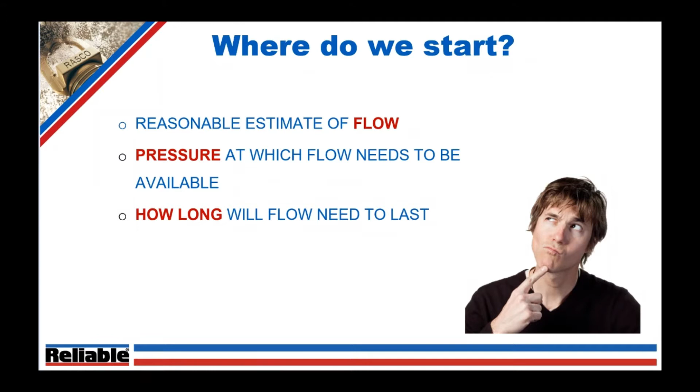Number 1, a reasonable estimate of the flow required. Number 2, the pressure at which that flow needs to be provided to us. Number 3, the duration—how long will the flow need to last? And then number 4, more germane to today's presentation, if it's got rack storage, are in-rack sprinklers necessary? That's where we're going to start our look into our storage occupancy.

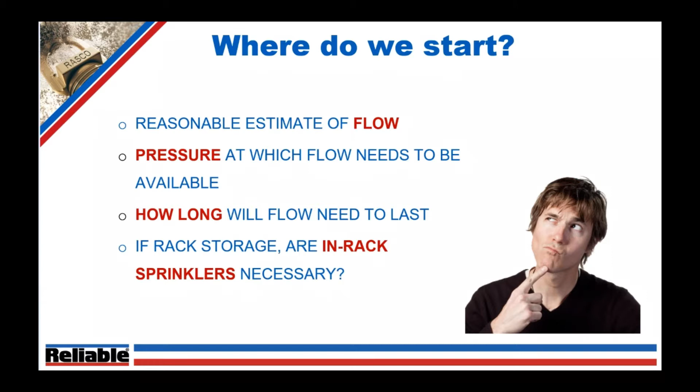Once we get to the point where we've decided that racks are necessary, we're going to get into the details of what that rack system looks like. As we move along here, the most prominent change to rack protection we'll be dealing with today is in the multiple row rack world, but there are some impacts to single and double row racks as well. So what I'd like to do is a quick review of the definitions of the 3 types of racks.

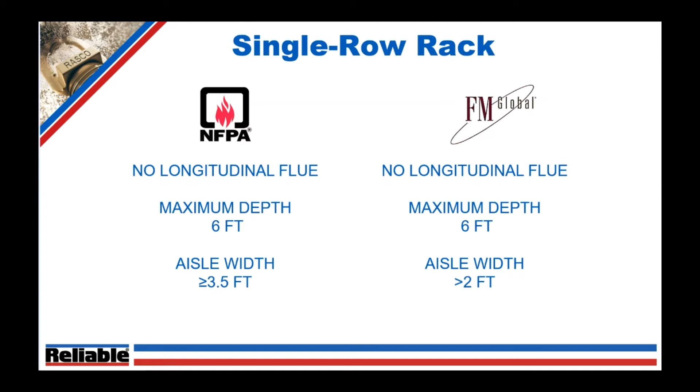Single row—pretty simple, right? Fairly straightforward. It's a rack with no longitudinal flue. Generally we see these up against the exterior walls, but they can exist out in the main area as well. The rack depth is limited to a maximum of 6 feet. NFPA defines an aisle as a minimum of 3.5 feet, whereas FM says it's a minimum of 2 feet. I always kind of look at the distinction between an aisle and a flue as whether or not I can run pipe through it. If I can't run pipe through it, that generally means there's going to be material handling equipment or people moving through it—in other words, it's going to be an aisle.

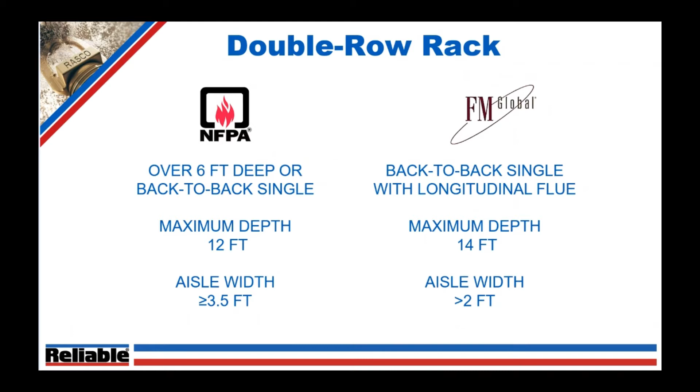Double row racks: while a longitudinal flue is common in double row racks, NFPA by definition does not require one—they could simply be backed up against each other with no longitudinal flue space. FM, in the definition of a double row rack, says it will have a longitudinal flue of 24 inches maximum. Maximum depth, again, is defined in NFPA as 12 feet, which is your two 6-footers back to back with no flue space. With FM, you have to do a little bit of math—at least this is my understanding. Two 6-foot racks with a maximum flue space of 24 inches would tell us that the maximum overall depth would be up to 14 feet. And again, aisle widths at 3.5 and 2 feet respectively for NFPA and FM.

Multiple row racks are essentially defined as a single rack over 12 feet deep, or single or double row racks with aisles less than 3.5 feet. The maximum depth of multiple row racks is essentially unlimited, which makes you wonder why we worry about aisles. But if we're going to call them aisles, the sections or groups of racks separated by those aisles must meet the 3.5 feet or 2 feet width shown.

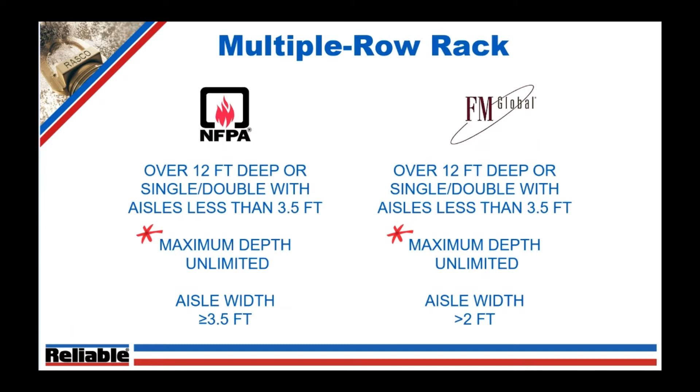Now, I do want to throw an asterisk on the maximum depth, since as we move through the presentation, that's only the case if certain particular conditions are met. That's the main change we're going to see happening here.

So in order to understand the impact of missing one of these conditions that require treatment as a solid shelf, I think it's also important to review the basic FM and NFPA requirements for in-rack sprinklers, solid shelf or otherwise, and we're going to start with FM.

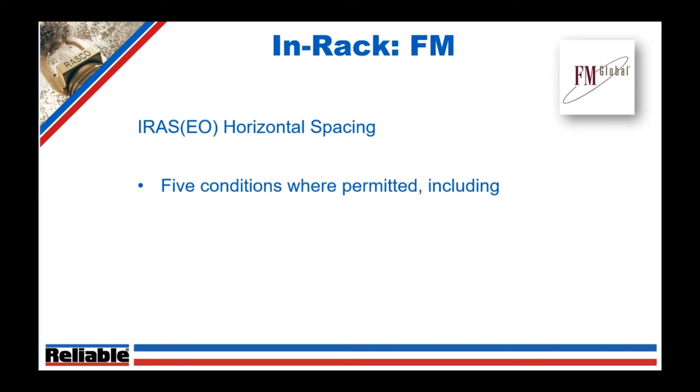FM makes horizontal spacing decisions relatively easy. They provide us two options: an every other or an every transverse flue space option. There are 5 conditions where the every other spacing is allowed. One of those conditions, since we're talking about solid shelves today, is that you can do an every other spacing where the solid shelves do not exceed 64 square feet and the ceiling height is 25 feet or less. Both of those conditions must apply in order to use the every other spacing.

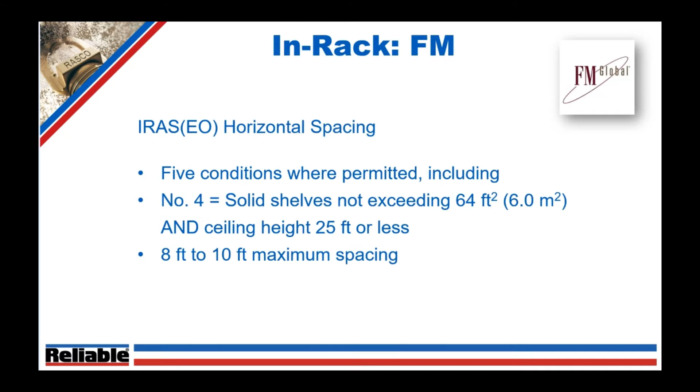In doing the every other spacing, as you read through the requirements in FM, you'll see that you end up in a spacing range of about 8 to 10 feet on center, 10 feet being the maximum. The every transverse flue space option is required everywhere the every other can't be used.

Pretty simple - look at the conditions in the preceding section. If I'm not in that condition, I have to do the every spacing option. So again, where every other is not acceptable.

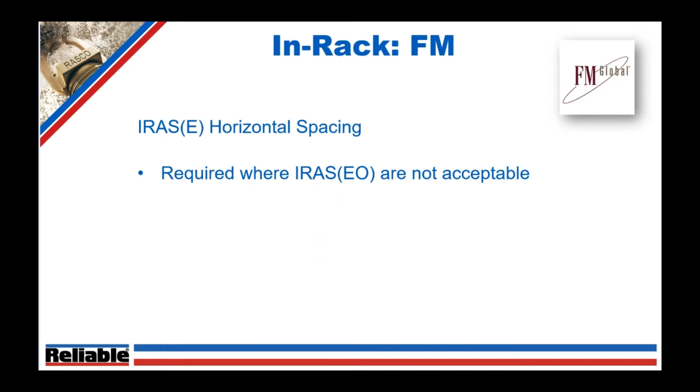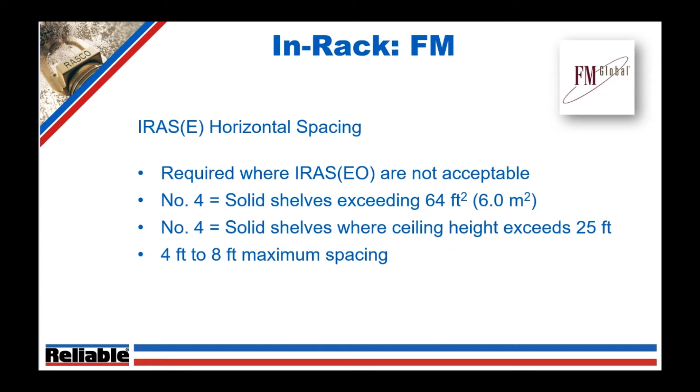Going back to number 4 in the preceding slide, when our solid shelves exceed 64 square feet, we are now into an every flue space option, or where we have solid shelves and the ceiling height exceeds 25 feet, we're going to be in the every option. Working through the diagrams and language in FM 8-9, you end up with spacing in the range of around 4 feet to a maximum of 8-foot spacing horizontally.

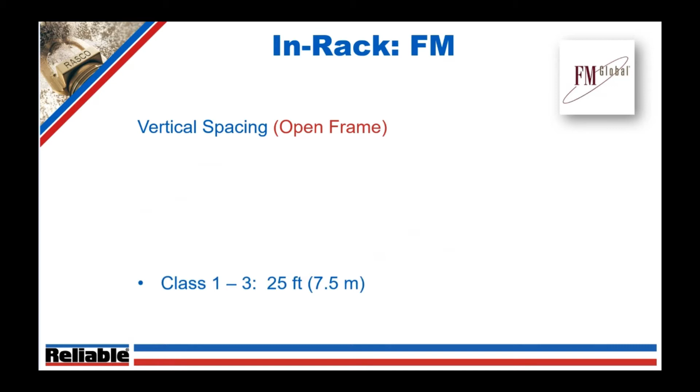If we then look at the vertical spacing of the sprinklers, where multiple layers are required, for open frame it's fairly straightforward. It ranges from 25 feet for class 1 through 3 commodity, and drops in 5-foot increments to our most hazardous commodities, the uncartoned plastics, at a 10-foot maximum vertical spacing.

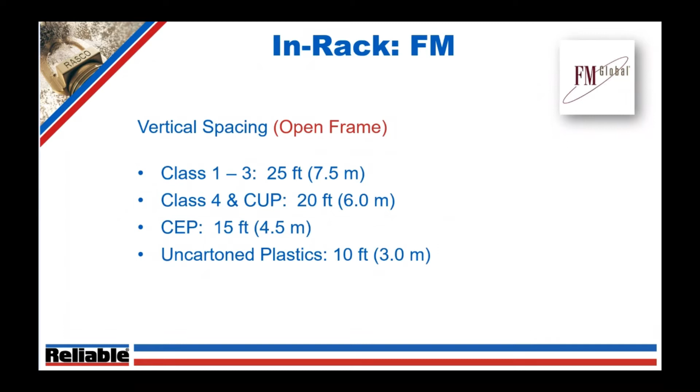When we transition to solid shelf, now we're out of the open rack, we're into solid shelf requirements. The vertical spacing becomes pretty easy for FM. Class 1 through 4 and cartoned plastics: a maximum of 15 feet vertical spacing, 4.5 meters. Any exposed plastics limited to 10-foot vertical increments.

When we exceed the 64 square foot limit of the solid shelf or the load, every single tier - pretty straightforward there. So if we miss the fact that we have a load or a solid shelf or unmaintained flue spaces that put us over the 64 square foot limit, and we miss that simple fact in our design or estimate, that could easily double the sprinkler count of the in-rack sprinklers.

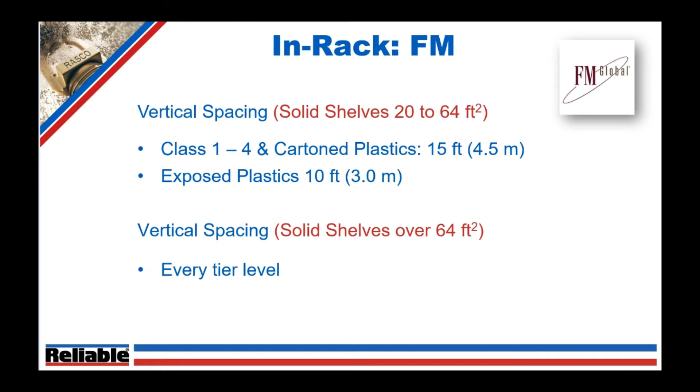In the NFPA world, what does that look like? Horizontal spacing, vertical spacing - I'm going to use the term 'elaborate' and I'm trying to use that term to be nice. The rules may seem simple, okay? They allow us to be less than 6 feet on center, our common limit for cold solder or impingement.

We can be a maximum of 8 feet for rubber tires. Now, I'm pulling this information out of the 2019 edition. It may seem a little bit helter-skelter, but this is the way they're listed in there. Maximum of 8 feet if we're storing rubber tires, and then a maximum of 10 feet on center for class 1 through 4 and basically all group A plastics.

Seemingly very simple, until you read this: unless specified elsewhere in the standard.

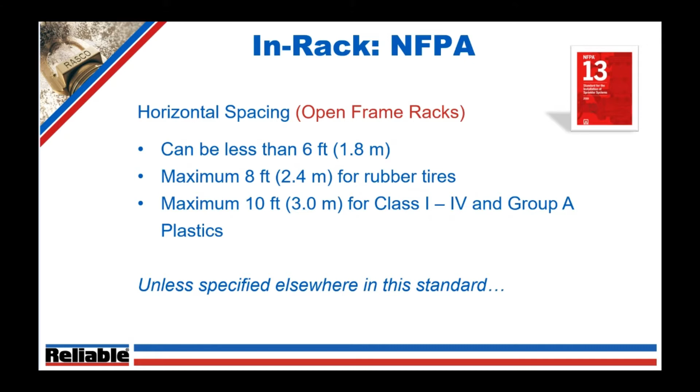Not unless specified elsewhere in this section, unless specified elsewhere in this standard. That's pretty wide open, so it's a convenient way for NFPA to add things and bury things. Hate to use that term, but do be aware that you cannot stop here. You've got to make sure that you go through all of those other sections.

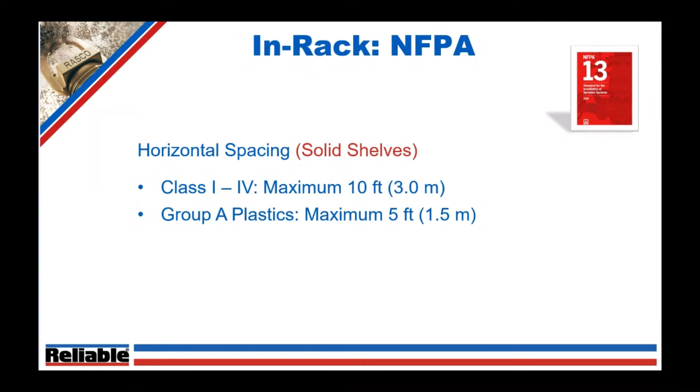Make sure there's not a charging statement that overrides these very simple ones in the beginning here. In the solid shelf world, remember the rules preceding were for open racks. There's not a lot of room for misinterpretation here, right? Either 10 feet on center for class 1 through 4, group A plastics, a maximum of 5 feet on center, regardless of shelf size.

The vertical spacing, NFPA world, in open frame racks. Basically straightforward. If I have one level of sprinklers, I'm going to put them at or above the halfway point of the storage. If I have more than one level, if I have 2 levels, I'm going to be at or above the 1/3 and 2/3 points of the storage.

So again, seemingly very simple until you read this, where not shown elsewhere on a figure. All right, so what is that? Basically, when you exceed 25 foot in height, you will be putting in rack sprinklers. So where not shown elsewhere on a figure essentially says, hey, once I'm over 25 feet, NFPA is going to give me a figure to look at and base my layout on.

So does anyone care to guess how many figures there might be? I counted them up, and then I lost count and started again and recounted. There are no less than 48 figures that you could possibly look at if you don't meet the criteria above, if you're over that 25 feet. 48 opportunities to be right or wrong. So I made a note here, if for no other reason, this might be a good reason to thank your favorite FM representative the next time you see him or her, because FM has made this a little bit simpler for us than NFPA has.

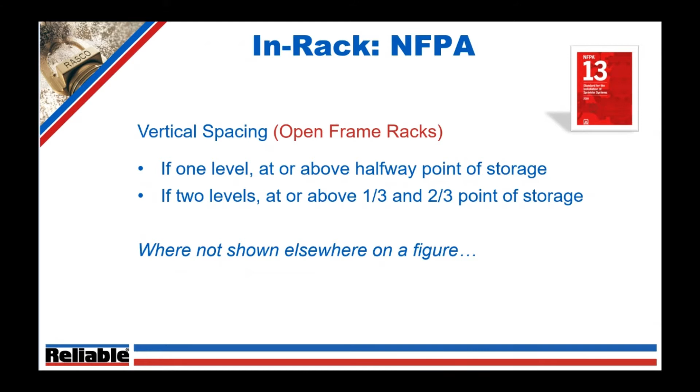So vertical spacing, when we're in the solid shelf world, again, defined by 20 to 64 square foot racks, or larger than 64, loads or solid shelves more than 64 feet, and also dependent upon the roof protection scheme. So it gets a little bit squirrely here, but not too bad.

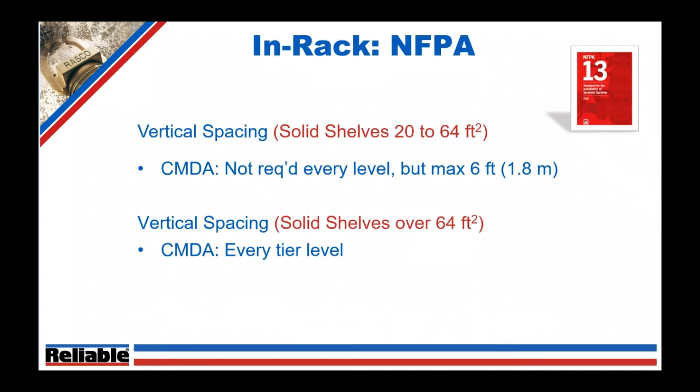If we have CMDA protection at the roof, and we have the smaller shelves less than 64 square feet, the vertical spacing is not required at every level, but it is limited to a maximum of 6 feet. I suspect in a lot of cases in the real world that means every level, but just be aware that it's every other in the smaller shelf world, no more than 6 feet vertical spacing between tiers of sprinklers. Once we're over the 64 square foot limit, every level. Pretty straightforward. So you got a couple options there in the CMDA world.

When we get into the vertical spacing for CMSA roof protection and ESFR roof protection, solid shelves of any size, small ones, large ones, protection at every tier level. So a little bit of a question here.

If ESFR and CMSA are considered or perceived as better fire protection, and I do want to be a little bit careful because any approved system, including CMDA, is deemed by the standard to provide the same minimum level of protection. But if we think that CMSA and ESFR might be better fire protection, why do we see no benefit when they're used with solid shelves, right? Sprinklers at every tier level.

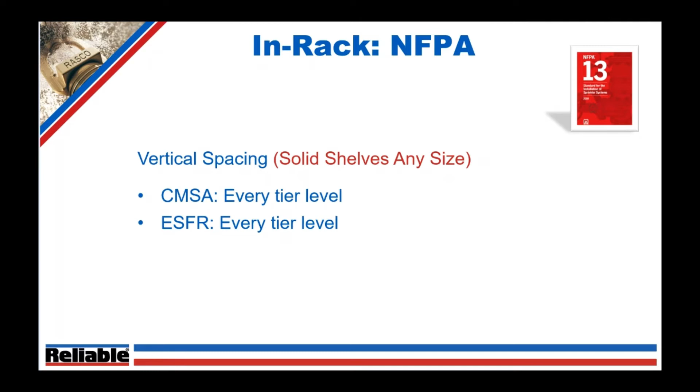And the reason kind of goes to the root of the presentation. A shielded fire is going to grow horizontally regardless of what sprinkler is above it. It's a fire. It doesn't know if it's ESFR or CMDA or CMSA. And the water that comes out of those upper fire sprinklers that can't reach the fire because it's shielded has no idea what kind of sprinkler it came from. So that is why in-rack sprinklers are the only solution to the solid shelf problem.

So I'm not showing you anything that you shouldn't already know. Longitudinal flue spaces perpendicular to the direction of loading, transverse flue spaces parallel to the direction of loading. So we've now gone through our occupancy analysis.

We think we've dialed in our rack system, and there's a but here, right? And I'm guilty of this. I remember not doing this. How often do we ask our customer, how wide will your flue spaces be and how well will they be maintained? And that brings us to the reason that we're really here.

Factory Mutual has already, and NFPA is in the process of, defining flue space conditions where racks without solid shelves must be protected as though they have solid shelves. Currently for FM there are, and for NFPA 13 in 2022 there likely will be, flue space conditions where racks without solid shelves must be protected as though they have solid shelves.

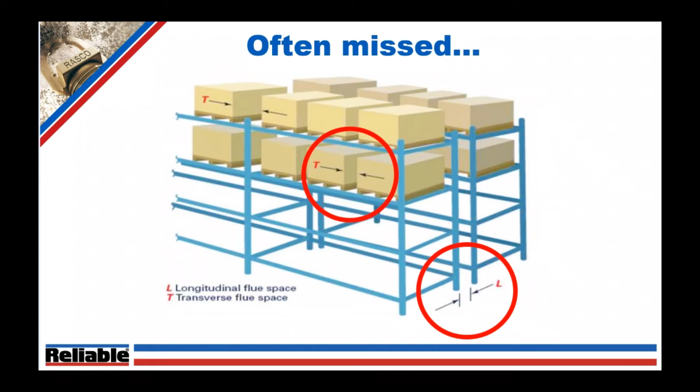Our goal of today - and there they are - your longitudinal and transverse flue spaces. We're going to talk about some of those conditions, but before we do, why is this so important?

If you don't utilize or don't have access to the NFPA 13 handbooks, either current or past, I would strongly suggest that you get those. There is a massive amount of commentary added by Matt Klaus and all of the folks that contributed to those documents, and they're going to give you some information that you can't otherwise get.

In particular, in the case of solid shelves and flue spaces, what purposes do they serve? They serve a number of purposes. Number one, they promote the vertical growth of the fire. We never want to have fire, but if we have fire in racks, we want it to go vertical to the sprinklers above it, and thereby restrict horizontal growth of the fire. Horizontal growth, bad. Vertical growth, not great, but better than horizontal growth.

Secondly, the flue spaces provide a travel path downward for the water from the sprinklers that will operate above. So the reason this is important - if it's done wrong, we will have put life and property in danger, not to mention the impact it might have on your business if you have some sort of negative incident.

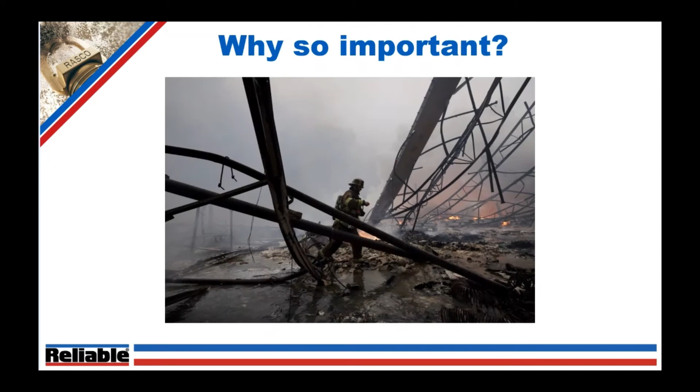So here's the information about flue spaces, and FM and NFPA are going to approach the situation a little bit different, but you're going to see that we end up in about the same spot. We're going to take a look at FM first, and I'm going to look in particular at section 2.2.3.1 for flue spaces.

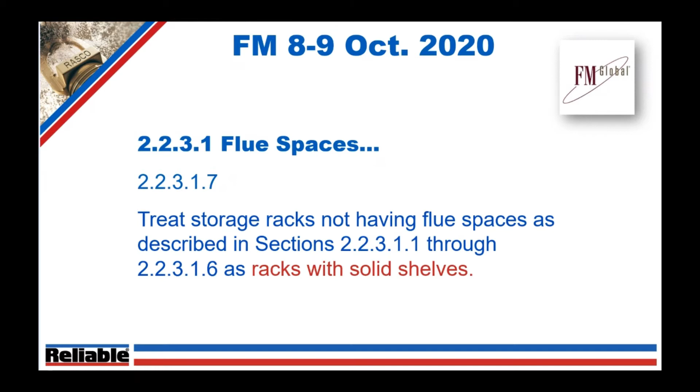Instead of starting at the top, I'm going to jump all the way to the bottom, number 7, 2.2.3.1.7, which essentially says that if you do not meet the criteria in items 1 through 6 above, you will protect those racks as though they have solid shelves. Okay, here's the 6 ways to stay out of it - if you don't meet it, item number 7, treat them as solid shelves. And again, we're going to see how NFPA takes a little different route to the same spot.

Here are the 6 conditions, and some of these are paraphrased for convenience. Provide 3-inch minimum transverse flue spaces at 4.5 feet on center in single row racks. Pretty straightforward - 3-inch minimum transverse flue, 4.5 feet on center, single row.

If I have 6-inch or greater well-maintained vertically aligned flue spaces in my single row racks, I can increase the spacing of those transverse flues up to 9 feet. So we get some benefit for well-maintained and larger flue spaces.

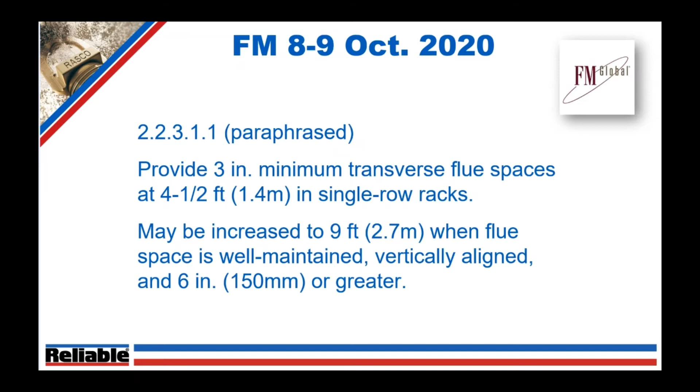What does that mean? If your flue spaces are not 3 inches wide, they must be treated as solid shelves. If you have 6-inch transverse flue spaces that are over 4.5 feet on center, they must be treated as solid shelves, and transverse flue spaces over 9 feet on center are always treated as solid shelves. And I may have misspoke - for less than 6-inch transverse flue spaces, over 4.5 feet on center, the middle item, treat as solid shelves. So pretty easy to understand.

And we're going to move on now to double row racks. So remember our definition from FM for a double row, you must have a longitudinal flue. Okay, that's part of their definition. So again, here we are at: provide 3-inch transverse flue spaces at 4.5 feet maximum spacing in double row racks.

And we see a little twist on the 9-foot rule. We can increase the spacing of the flues to 9 feet when we have those well-maintained 6-inch or larger transverse - and this is an 'and', not an 'or' - when we also have a 6-inch or greater vertically aligned longitudinal flue space.

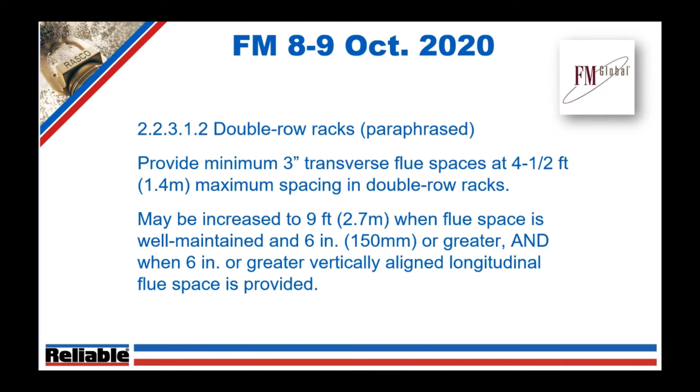Okay, so to go out to 9 feet, we must have the flue space 6 inches or greater, vertically aligned, well-maintained. What does that mean? Again, if the transverse flue spaces are not at least 3 inches wide, treat as solid shelves. How many times do we ask the customer how wide their flue spaces are? I don't ever remember doing it. This would be very important to know.

For less than 3-inch transverse flue spaces, similar to our single row, we're going to treat those as solid shelves. For minimum 6-inch transverse flue spaces that exceed 4.5 feet, without the longitudinal flue space, treat those as solid shelves. And for transverse flue spaces that exceed 9 feet, treat as solid shelves.

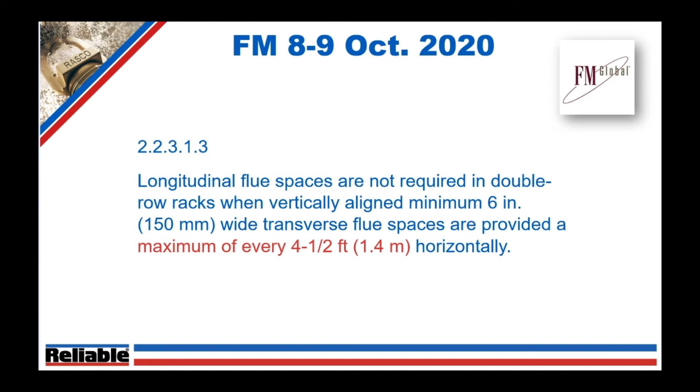The third condition. We were just reminded a minute ago that the definition for double row racks states that a longitudinal flue space is required. We saw some leniency for well-maintained flue spaces and the allowance to go out to 9-foot spacing. And then we get thrown a little bit of an exception here. Longitudinal flue spaces are not required in the double row racks when the transverse flues are 6 inches wide and do not exceed 4.5 feet on center. Again, 6 inches wide, no more than 4.5 feet on center. The longitudinal flue in that double row rack can go away.

What does that mean in kind of reverse language? If we don't have a longitudinal flue space and our transverse flues are not 6 inches wide, we're going to treat them as solid shelves. If no longitudinal flue space is present, anytime the transverse flue spaces exceed 4.5 feet on center, we're going to treat those as solid shelves.

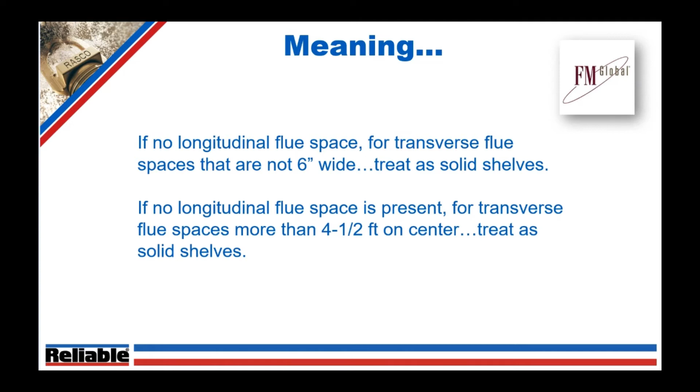2.2.3.1.4, our fourth condition, now moving into multiple row racks. In multiple row racks, pretty straightforward. Maintain 6-inch wide, not 3-inch, 6-inch wide vertically aligned longitudinal and transverse flue spaces at 5 feet on center throughout the height of the rack. Pretty straightforward. 5 feet on center, 5-foot cubes, 6 inches wide, vertically aligned, well-maintained flue spaces. Away you go.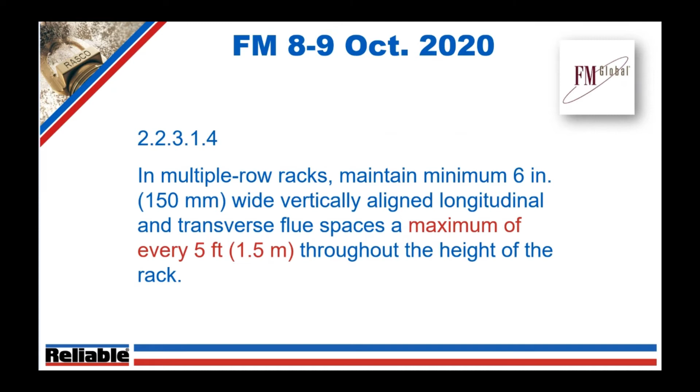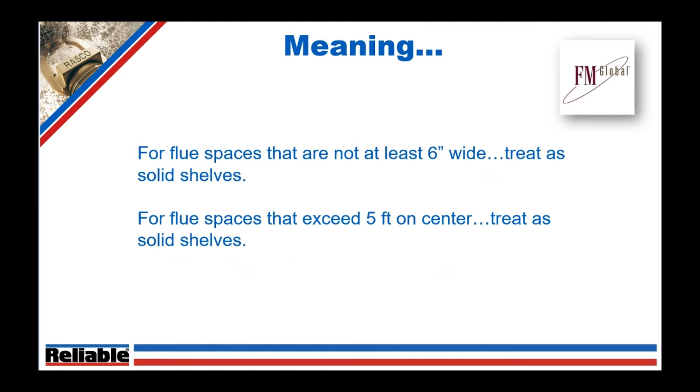What does that mean? If those flues are not 6 inches wide, we've got to treat them as solid shelves. If the flue spaces exceed 5 feet on center, treat them as solid shelves.

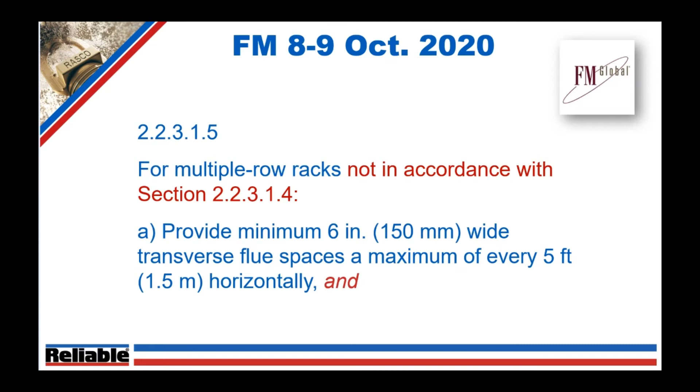22315 is going to provide a slight exception to the previous rule. And what it's going to say is for multiple racks that do not meet the 5-foot cubes previously outlined, we still must provide the 6-inch wide transverse flue spaces a maximum of 5 feet horizontally. So right off the bat here for multiple row, you can see we always must have 5-foot increments, transverse flues, 6 inches wide. If we don't have that right off the bat, we're at solid shelves. Now, in order to meet the second part of this, again, transverse flues every 5 feet horizontally, and the depth of the rack is then limited to 20 feet, as defined by FM utilizing an 8-foot wide aisle.

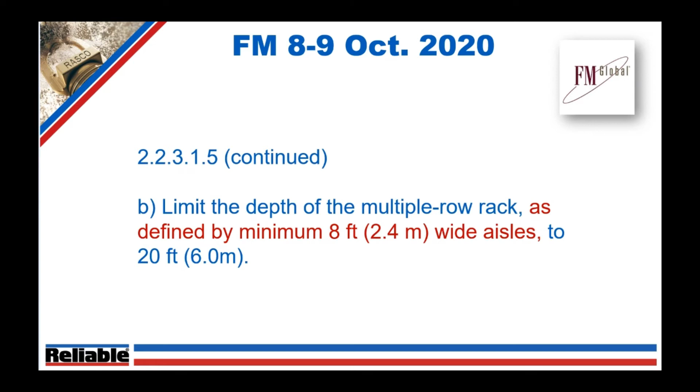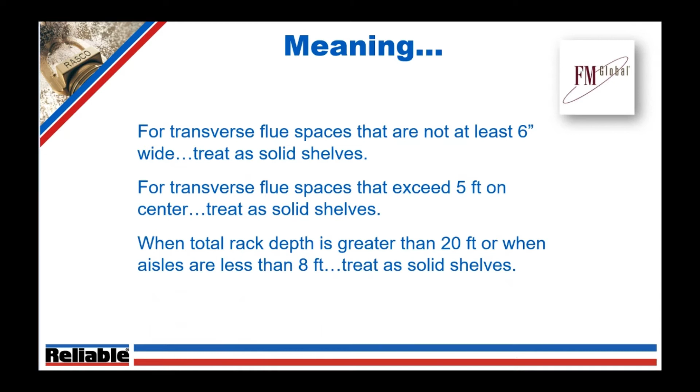Okay, so two things there. If you don't meet either one of those, you're into solid shelves. Transverse flues that are not 6 inches wide, solid shelves. Transverse flues that exceed 5 feet on center, solid shelves. When the total rack depth exceeds 20 feet, or when the aisles are less than 8 feet, solid shelves.

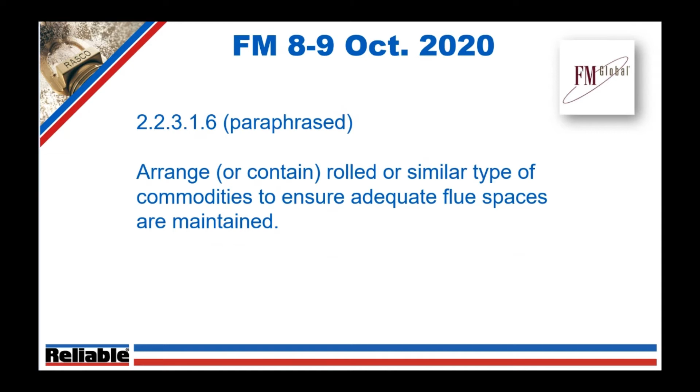And then 22316, kind of a slight catch-all here, but in those cases where you might have a bagged type of commodity or something that doesn't hold its shape, 22316 essentially says to arrange those or contain them somehow. This might be some fencing up the sides or whatever it is, to ensure that they don't flop over, so to speak, into the flue spaces. If you can't do that, or if that's not done, we must then treat those racks as solid shelves.

What is NFPA looking at doing? Now remember, the rules in FM that we just went through exist today. They exist today. If you're doing an FM job, you would want to certainly be looking at those. We understand, like most of you do, that something that's proposed for 2022 very likely will get in there. There's a slight chance through the process that it would get changed. If it does get added into the 2022, we understand it may be years before it's adopted, but that doesn't prohibit you, nor should it, from being educated on the subject.

So this is what is looking to happen in 2022. The references that you see, because this is out of the second draft of the committee process, may be close, but may not be exactly to what is in the 2019. That's all part and parcel of the renumbering scheme that often takes place here.

As I mentioned, NFPA is going to take a slightly different route to the same destination. Unless the requirements of the subsequent sections are met, double row racks without solid shelves shall be considered racks with solid shelves where you do not have longitudinal flue spaces. Remember, the definition said you don't have to have a longitudinal flue space for a double row rack in NFPA world. What they're telling you is if you don't have that longitudinal flue space, then that open rack needs to be considered a rack with solid shelves. So right off the bat, they give us the charging statement.

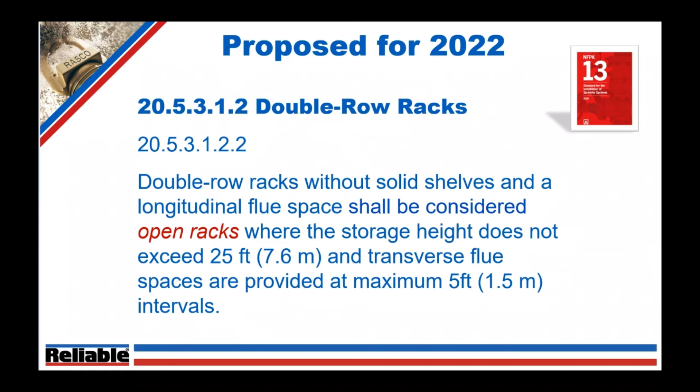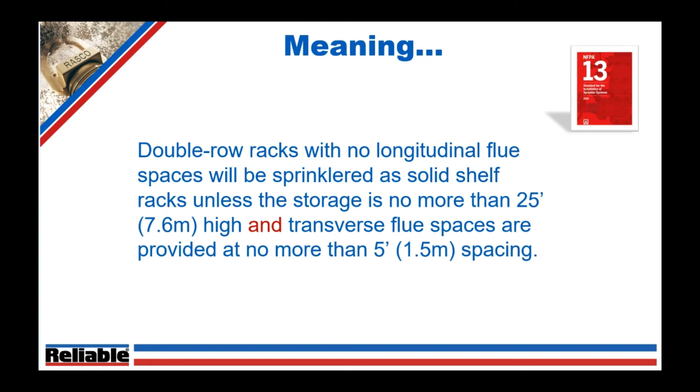So we were just told that if you don't have a longitudinal flue space, you treat them as solid shelves. We're now told that you can leave that longitudinal flue space out as long as you don't exceed 25 feet and you provide the necessary transverse flue spaces at 5 feet on center. So what does that mean? Double row racks with no longitudinal flue space will be sprinklered as solid shelf unless we're limited to 25 feet, and we provide the transverse flue spaces at no more than 5-foot spacing. Both conditions must apply in order to be treated as an open rack.

What about multiple row racks? Remember, our goal at the outset was to identify conditions where racks without solid shelves must be considered as racks with solid shelves. So not a lot of room for interpretation in the proposed language in 2022. Unless the requirements below are met, multiple row racks without solid shelves shall be considered racks with solid shelves. Same language we saw for double row.

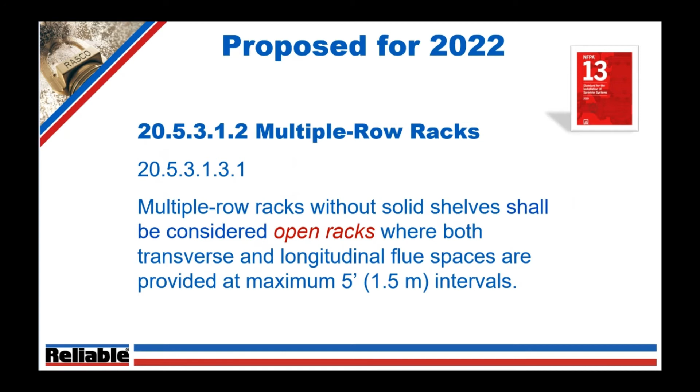And similar to what we saw with double row, we immediately see the exceptions. So what are the exceptions? When can I still look at them and consider them open racks? We can do exactly what FM said: transverse and longitudinal flue spaces at 5-foot cubes can be considered open racks. So again, we're ending up in the same essential land, so to speak, as FM with this language in NFPA. 5-foot cubes, transverse, longitudinal, can be considered open racks.

What about the next exception? We end up right essentially where FM landed as well. Multiple row racks without solid shelves can be considered open racks where transverse flue spaces are provided at maximum 5-foot intervals. So again, no option for deleting transverse flue spaces, none. They always must be there at a maximum 5-foot interval. And again, similar to FM, the rack depth cannot exceed 20 feet.

The only difference between NFPA and FM is the requisite aisle width. NFPA permits that aisle to go down to 3.5 feet, where FM takes a more conservative approach, requiring that separation be out to 8 feet. But we've essentially ended up in the same spot with this 20-foot depth limit of multiple row racks that do not have a longitudinal flue space.

So picture a pushback rack, where as you load it, either on rollers or however it's done, the pallet being pushed into place butts right directly up against the one behind it, and you simply keep pushing these in. There's no longitudinal flue space maintained or provided. That rack depth is limited to 20 feet deep. If you exceed 20 feet, or if the aisle widths come down below the 3.5-foot mark, you're going to be treating those as solid shelves.

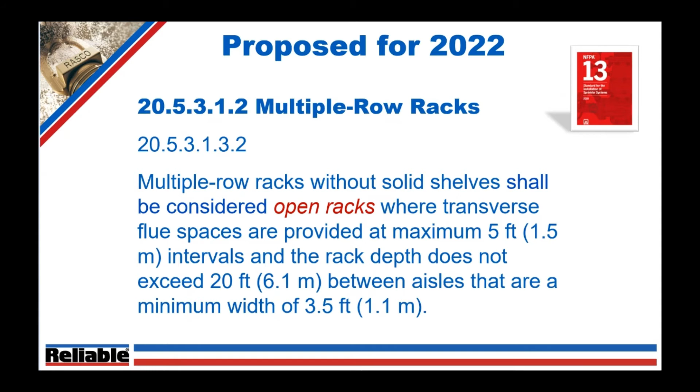So let's take a look again in plain English understanding of this. We end up right where FM is: multiple row racks must be sprinklered as solid shelf anytime the transverse flue spacing exceeds 5 feet. Pretty straightforward. If you look at it and you've got 5 foot 1 inch spaces, talk to your AHJ maybe, but let's say you've got a 6-foot space, you're definitely into this world of treating them as solid shelves.

Multiple row racks that do not have a longitudinal flue still have to be 5 feet on center with your transverse flues. We know that. Those can be, or must be, sprinklered as solid shelf where the overall depth exceeds 20 feet.

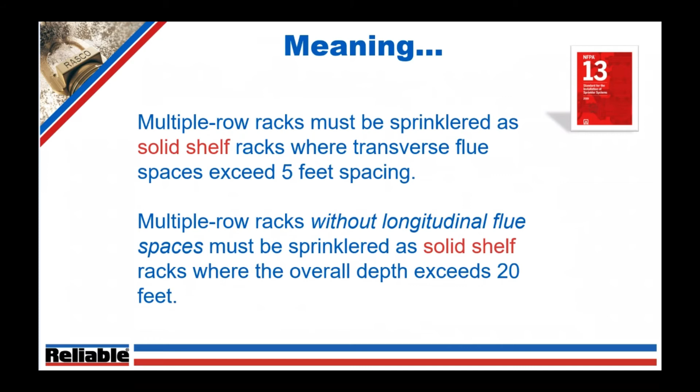So again, we've got to start looking at not just the plan view. I see that there's a rack that's this deep, I know it's this tall, but we really have to dial in to what those flue spaces look like, and how well they're going to be maintained, which brings us to this topic.

So how do we monitor the flue spaces? For FM Data Sheet 8-9, we see language like well maintained and vertically aligned. Okay, some gray area there, I guess. Well maintained could be argued a little bit; vertically aligned is a little more strict, as well as the dimensions provided, right? Our 3 inches, our 6 inches. So again, this is what's available to the owner and to us to look at and go, okay, they need to be well maintained and vertically aligned in the FM world.

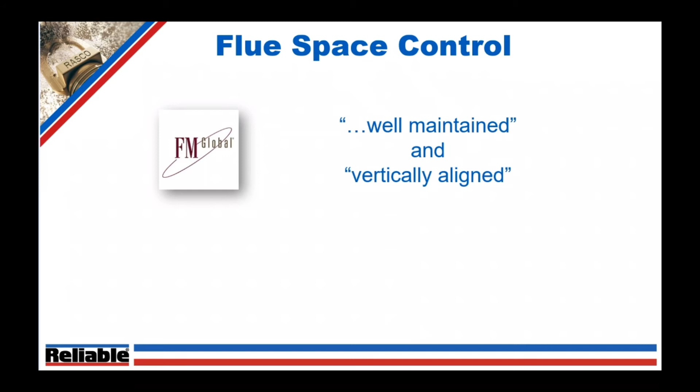NFPA has a statement essentially that says random variations in the width of flue spaces or in their vertical alignment shall be permitted. So what does that mean? It's standards language for sure, but by leaving it somewhat open, we now have to look to an AHJ or some other enforcement agency to say, I think that doesn't meet the intent of random variations and things like that.

But again, that's what's at stake here, right? We've said you're going to do this. How do we make sure you're doing it? It becomes an enforcement issue by either the insurance company or the AHJ.

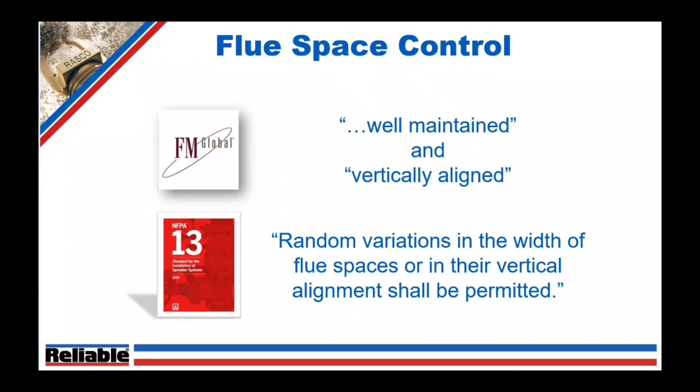So what does all this mean? And it looks like we're going to finish a little bit early today because we're going to be through it here in just a few minutes. So what does it all mean? It may be a little easier if we just simply play a little game of what if, okay?

So what if I miss this in my bid? I've put my price together, I've missed this in my bid. Well, it kind of depends, I guess. Did everybody miss it? If everybody missed it, then at some point the issue is going to have to become illuminated.

If at least one other bidder addressed it, someone else said we have to do this, then obviously when someone starts looking at the bids themselves, what are the bids that came in? Wow, why is there such a discrepancy between bidder A and bidder B? The sheer magnitude of these types of mistakes would become apparent, we would hope, in the bid process.

And at that point, you maybe get an opportunity to rebid or address the situation with your customer. I would really rather be the guy that bid it correctly the first time, right? That's where you want to be. I would rather be the guy that said, hey, I think this is necessary based on everything you've told me. What does that do? It makes you the expert. It makes someone who didn't address it less than an expert.